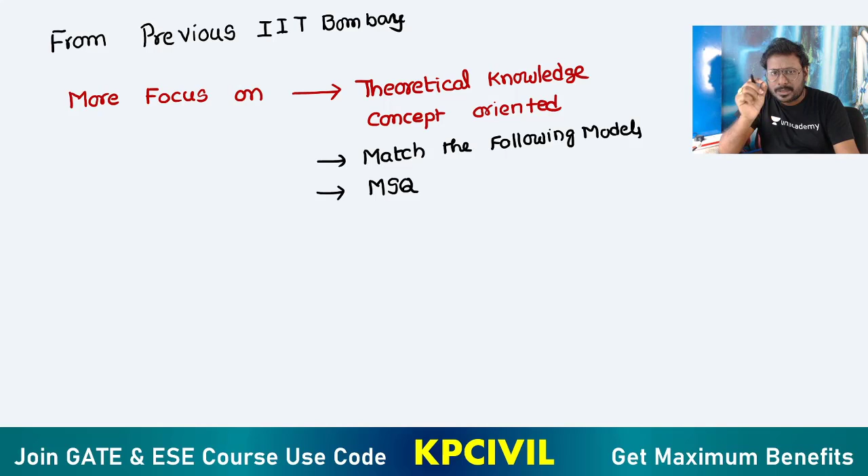All the questions are concept oriented, and the numericals are direct questions. From environmental engineering, there is no need to worry about numerical questions, they are direct. But concept oriented theoretical questions are coming, so focus on that. So what topics to focus on? You have to focus on the topic of sedimentation.

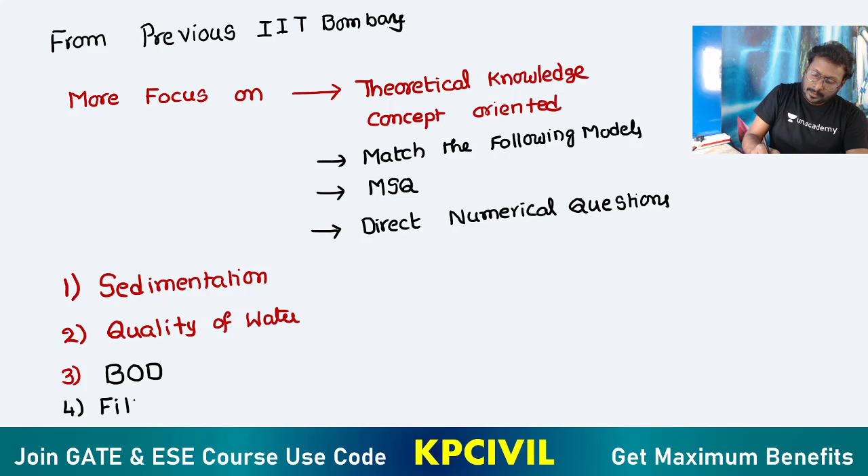As usual, we have theoretical questions from quality of water. Previous papers have more questions from quality of water. Environmental engineering will have more questions from quality of water, especially BOD and filtration. From these four topics, there are repeated questions. Also focus on activated sludge process. From the previous IIT Bombay papers, they give more weightage on quality of water and BOD questions. After that, they focus on sedimentation and filtration. From wastewater engineering, the one and only topic they focused more on is ASP, activated sludge process.

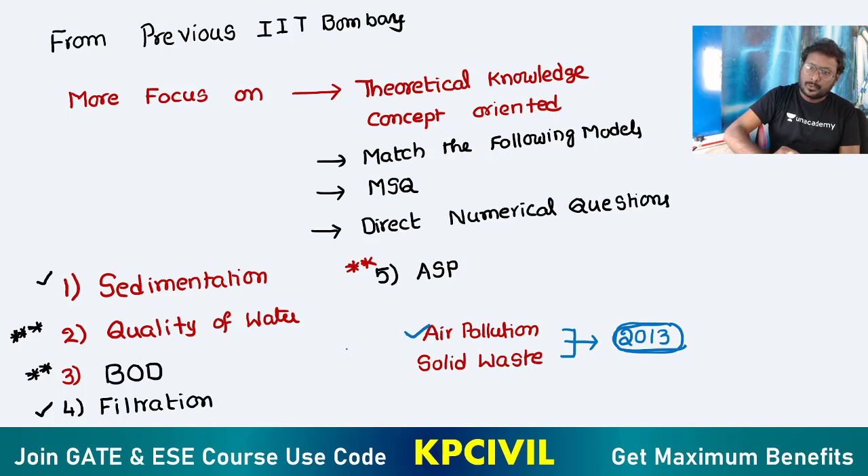Now you have one doubt - what about air pollution and solid waste management? These topics came into existence with more preference given in GATE examination only after 2010. After 2010, IIT Bombay conducted the exam only once, in 2013. In that year, they gave one numerical question from air pollution. So we expect these topics to come this year.

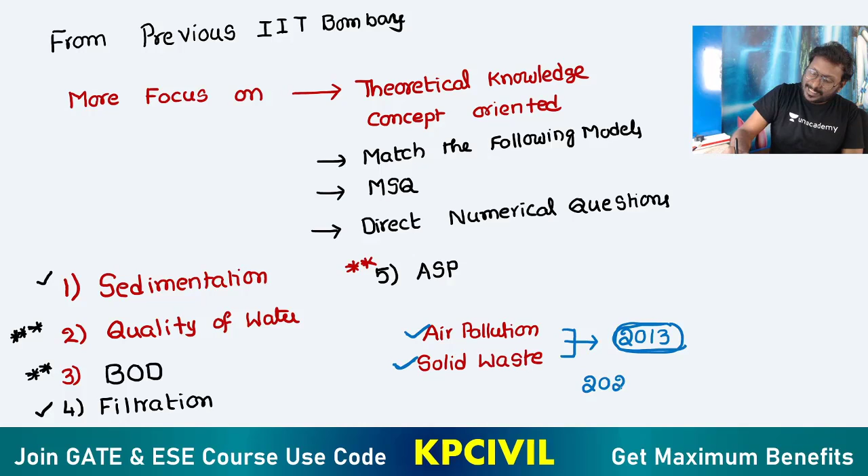In 2021, we have more expectations on air pollution and solid waste. Don't miss these topics. So if you want to solve questions from environmental engineering of IIT Bombay, these 7 topics are your target: sedimentation, quality of water, BOD, filtration, activated sludge process according to previous questions, and additionally focus more on air pollution and solid waste management.

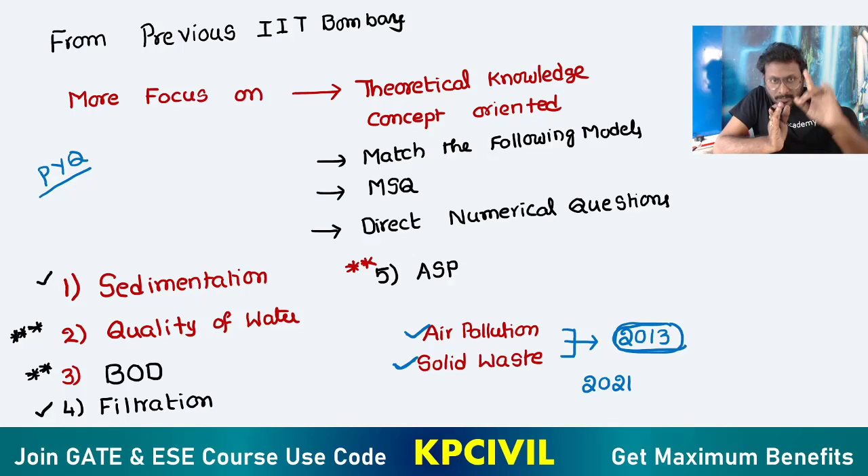A very important point I would like to tell you - IIT Bombay has not taken anything from other IITs' previous year papers. IIT Bombay has set a path for other IITs to follow. It has not at all taken any previous year question from other IIT question papers. Rather, other IITs have taken previous questions from IIT Bombay paper. So previous year questions of other IITs are not followed by IIT Bombay. Especially I am saying this about the environmental engineering subject. I don't know about other subjects, I have not analyzed that till now. Now I am saying this only about environmental engineering. Got it? You got the clarity?

About environmental engineering related to IIT Bombay, you focus on these 7 topics. More focus on concept oriented, more focus on theoretical knowledge. Especially you focus on match the following models.

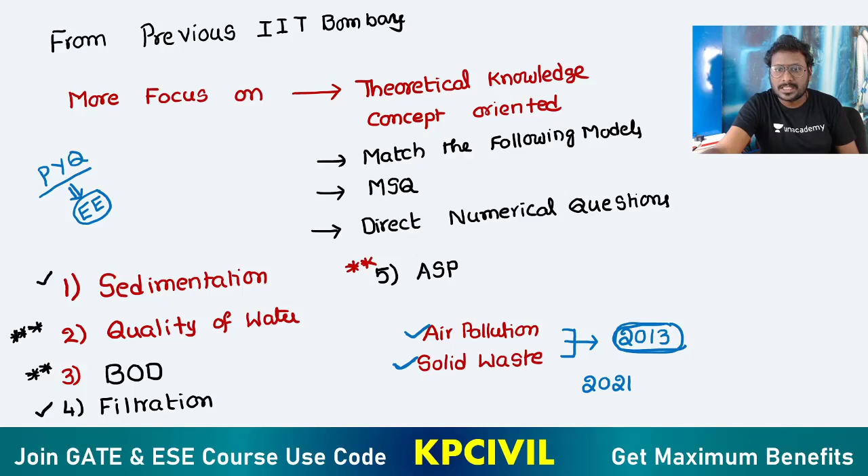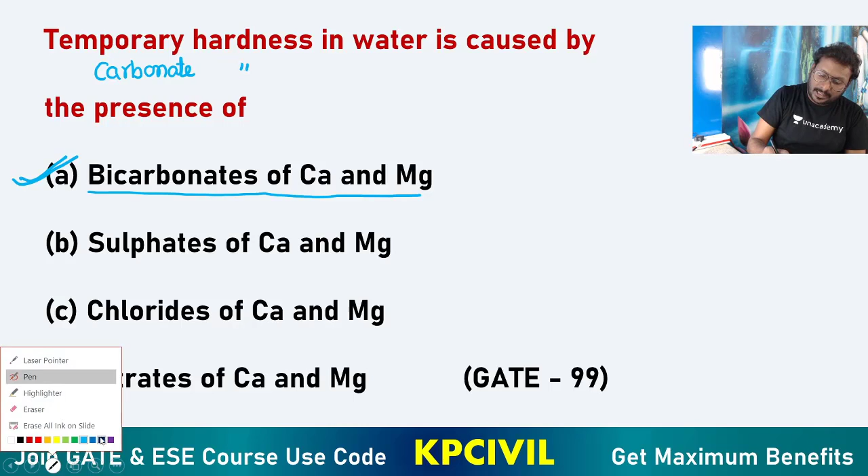Now we'll go ahead to solve the questions of IIT Bombay. Temporary hardness in water caused by presence of - several times in my classes I came up to solve this kind of model. I repeatedly told students this model of theoretical question is very important. Temporary hardness in water is caused by bicarbonates of calcium and magnesium. Any difficulty in the question? Only your confusion makes it difficult. Temporary hardness is also called carbonate hardness - both are same, just alternate names. So that was caused by bicarbonates of calcium and magnesium.

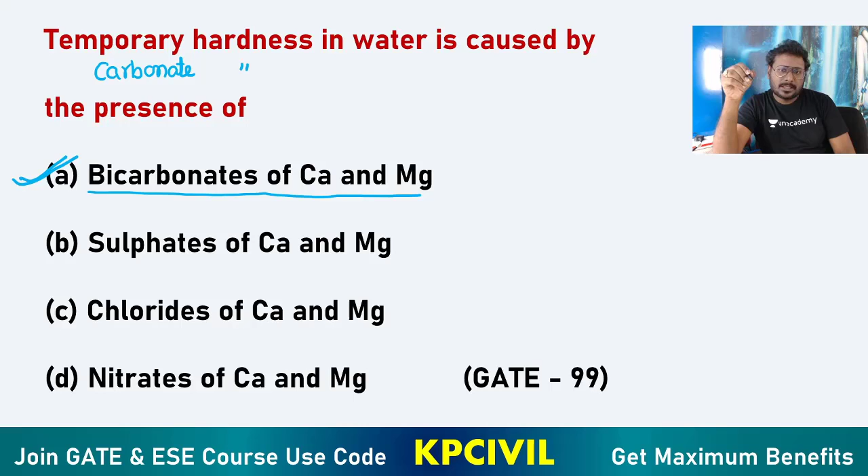Check out next options: sulfates of calcium magnesium, chlorides of calcium magnesium, nitrates of calcium magnesium. These three will cause permanent hardness, also called non-carbonate hardness. So this may be expected as MSQ.

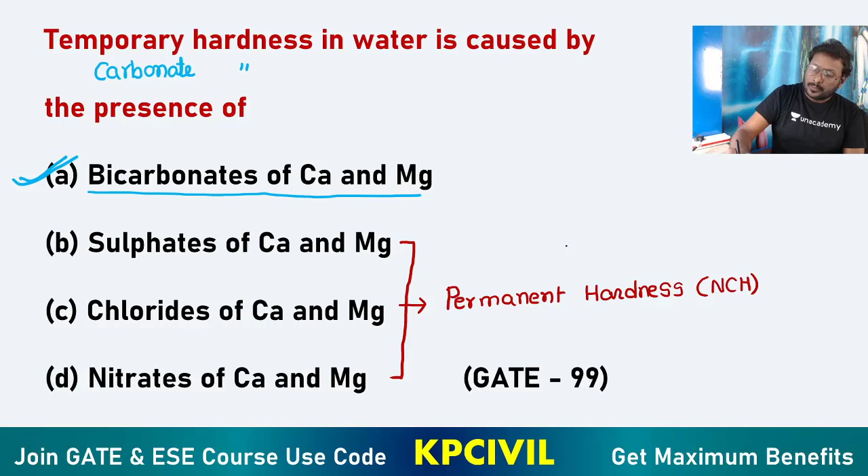In 2021, this may be expected as MSQ, multiple select question: chlorides of calcium and magnesium, sulfates of calcium and magnesium, nitrates of calcium and magnesium. So all 4 same options they will give. Permanent hardness of water is caused due to all 3 - B, C, D. It is given as MSQ question, so B, C, D will become your answer for permanent hardness. But as per the 1999 paper, the option is temporary hardness of water caused due to bicarbonates of calcium and magnesium. We'll move on to the next one.

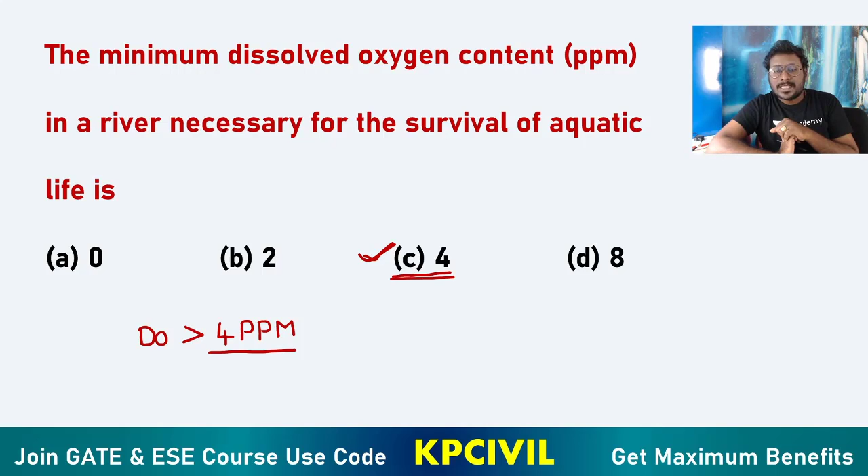The actual answer is that for all aquatic life, dissolved oxygen must be greater than 4 ppm. According to the options, we select option C, 4 ppm. Clear, minimum dissolved oxygen content for aquatic life is greater than 4. Only for fishes is it 4, but we don't have such an option here, so we select option C, 4 ppm. Minimum DO required in a river for survival of aquatic life is 4 ppm. These are all conceptual, theoretical questions depending upon quality analysis of water.

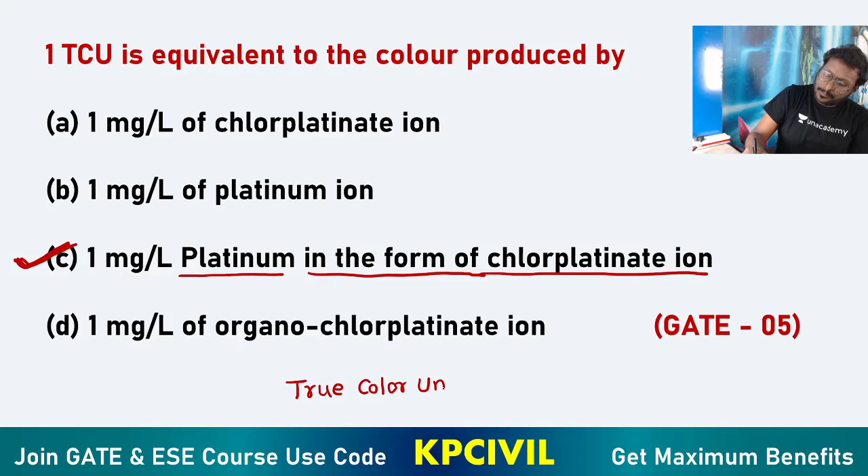1 TCU is equivalent to the color produced by 1 mg per liter of platinum, added in the form of chloroplatinate ion, not by chloroplatinate, not by platinum alone. So the answer is option C, not A and not B. But mostly in a hurry, we answer A or B, and get negative marks. Be careful regarding answers, especially theoretical questions. So what is the answer? 1 milligram per liter of platinum added in the form of chloroplatinate ions, that is 1 TCU. What is TCU? True color unit. 1 TCU is equal to 1 true color unit.

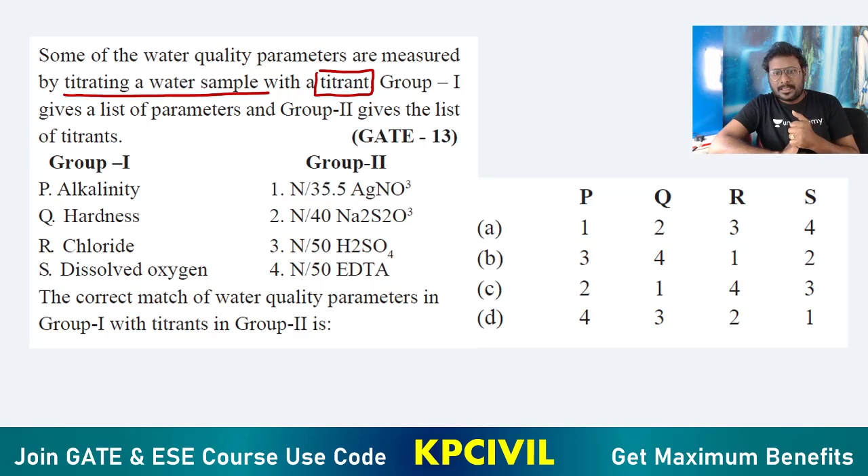I told you in the beginning, in the introduction itself, about match the following questions. Some water quality parameters are measured by titrating a water sample with a respective titrant. Group 1 gives a list of parameters, Group 2 gives a list of titrants. So Group 1 is the quality parameter, Group 2 is the titrant. You need to match both.

Alkalinity - the titrant for an acid is alkali, and the titrant for an alkali is acid. H2SO4, so it is 3. Hardness - what is the titrant for hardness? EDTA, ethylene diamine tetraacetic acid.

EDTA, I will write it down: ethylene diamine tetraacetic acid, EDTA. So hardness is EDTA, number 4. Chloride is nothing but silver nitrate, AgNO3. Dissolved oxygen is Na2S2O3, sodium thiosulfate. So the sequence is 3, 4, 1, 2.

Option B: 3, 4, 1, 2. For alkalinity, sulfuric acid H2SO4; for hardness, EDTA; for chlorides, silver nitrate AgNO3; for dissolved oxygen, sodium thiosulfate Na2S2O3.

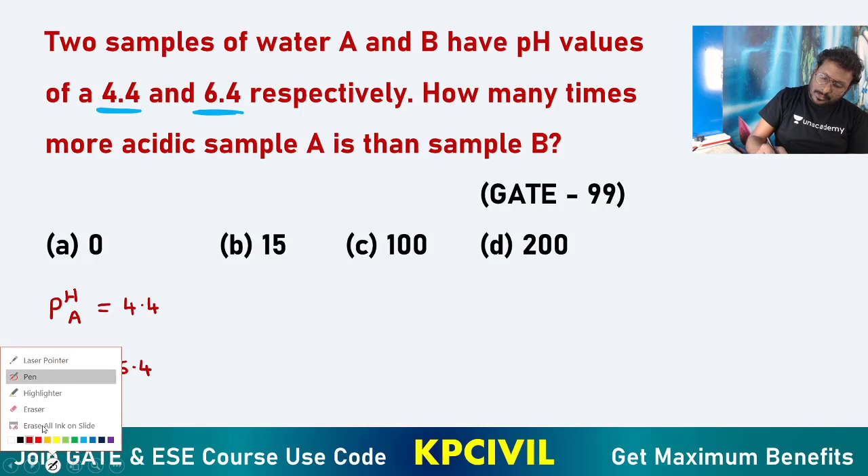pH of B, you take it as 6.4. I am writing hydrogen ion concentration here, because solution A and solution B pH values are not at all compared anywhere, only compared with hydrogen ion concentration. Hydrogen ion is 10 power minus 4.4 for A, 10 power minus 6.4 for B.

Now I am taking the ratio of hydrogen ion concentration of A to hydrogen ion concentration of B. What can we write down? 10 power minus 4.4 by 10 power minus 6.4. What does it come to? 100. 100 only, no? We write it down like this.

H plus of A is equal to 100 into H plus of B. So how many times higher? 100 times, option C, no? H plus of A is 100 times higher than H plus of B. That is the answer. Got the clarity? You understand the question? Simple. Ratio of hydrogen ion of A to B, that is the answer, 100 times.

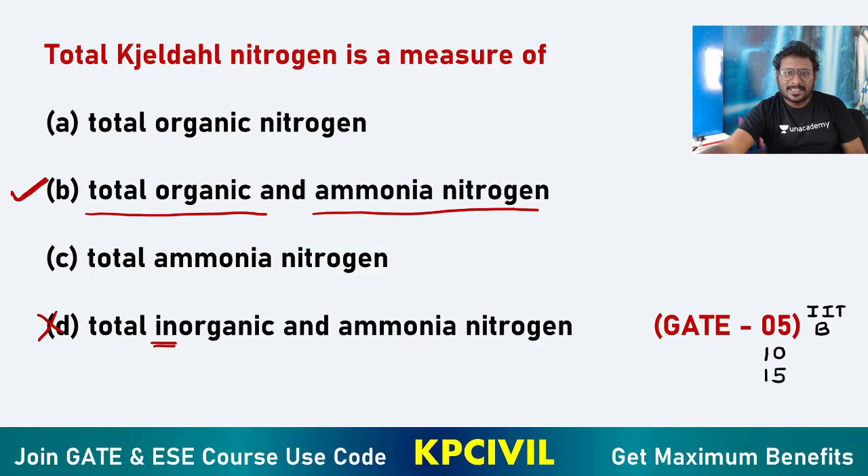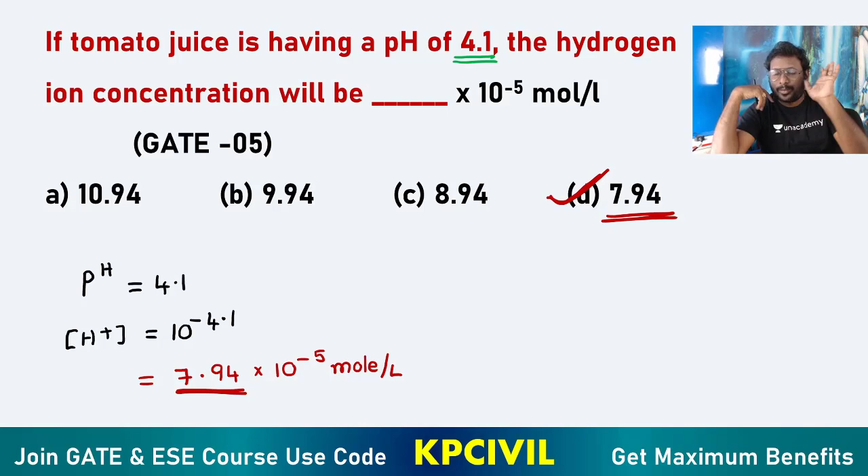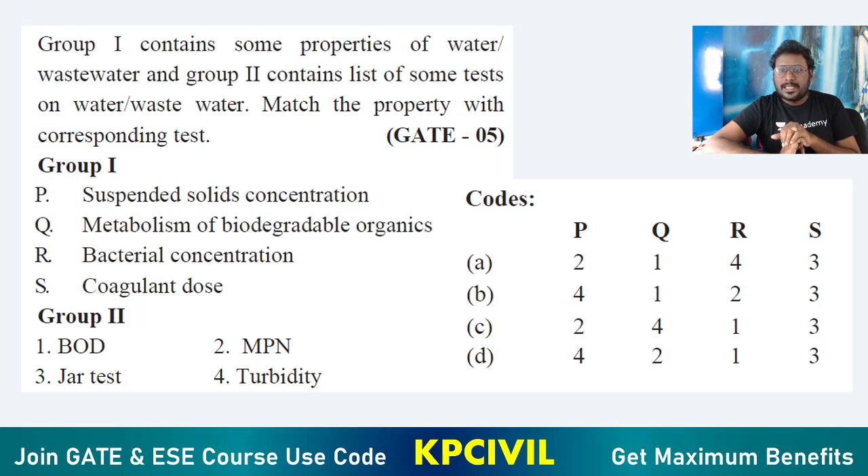Wow, again match the following. See how many match the followings are coming. Group 1 contains some property of water or wastewater. Group 2 contains a list of some tests on water and wastewater. Match the property with the corresponding test.

Suspended solids concentration - suspended solids estimated by turbidity. Suspended solids concentration is known by turbidity test.

Metabolism of biodegradable organics - biodegradation of organic matter. So how can you express biodegradable organic matter? Biodegradable organic matter is directly proportional to biochemical oxygen demand, BOD.

So only one option is matching 4-1. Directly we can give the answer: 4-1, 2-3. Bacterial concentration is nothing but most probable number, MPN. You are determining bacterial number by the most probable number test, MPN.

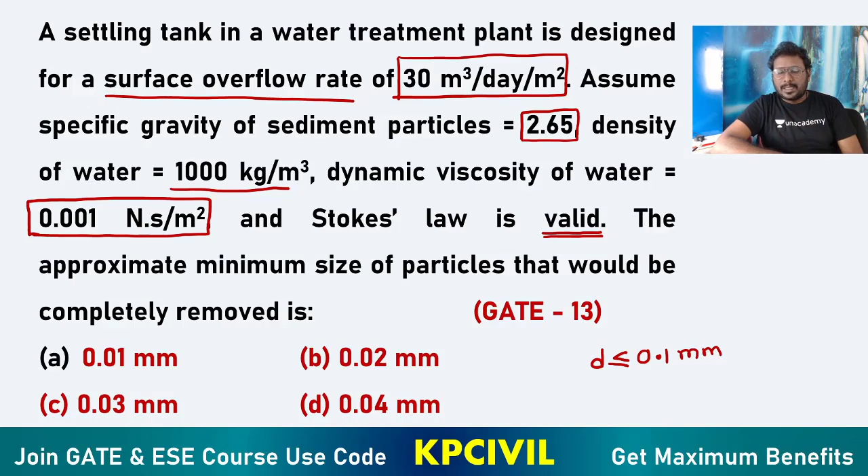The approximate minimum size of particles that would be completely removed is - so the lowest diameter of particle that should be removed. So we have the formula for settling velocity.

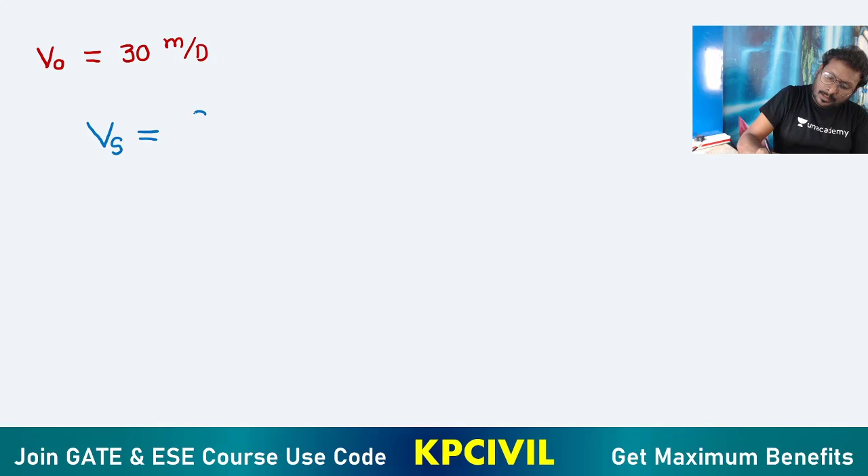We can write down Vs is equal to G d square by 18 mu, into rho p minus rho w.

And the particle is completely removed. What is the meaning of completely removed? V naught itself is taken as Vs. So take Vs as 30 meter per day.

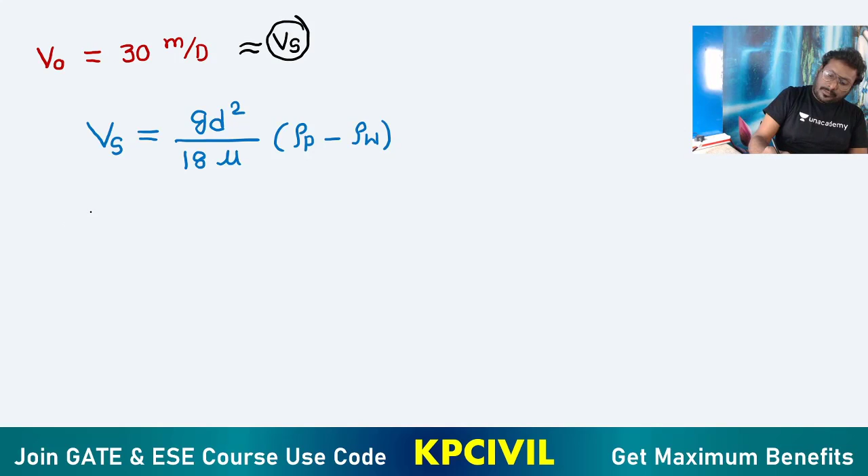Convert to second: 30 divided by 24 into 60 into 60. Why we are taking this? For conversion of meter per day to meter per second.

This is the settling velocity Vs. Substitute into the formula. G is 9.81. D is required, that is only needed, diameter. Diameter only needed, you write down D square.

18. Dynamic viscosity given. What is the value of dynamic viscosity? 0.001 Newton second per meter square.

Density of particle given, specific gravity given. Specific gravity how much? 2.65. So density of particle is equal to 2.65 into density of water, 1000. You take 2650 kg per meter cube.

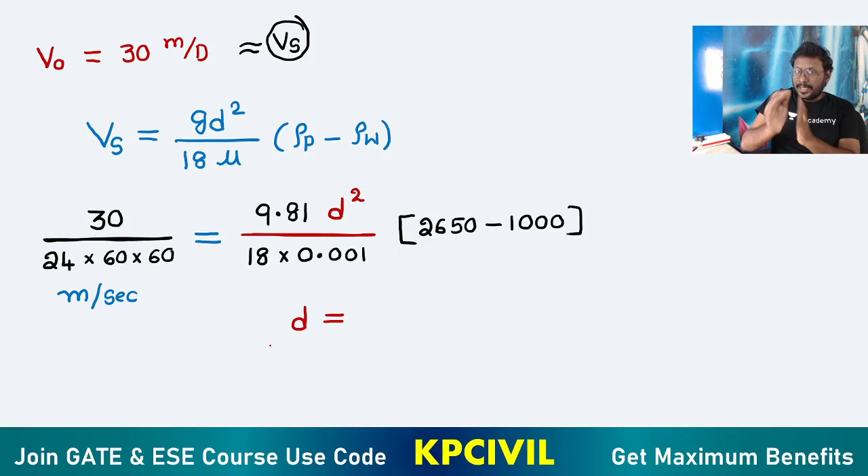So you need it in millimeter. First, what you are getting is in meter. What you are getting? 1.96 into 10 power minus 5 meter.

So you have to convert to millimeter now. To convert meter to millimeter, you multiply with 1000. What you can write down?

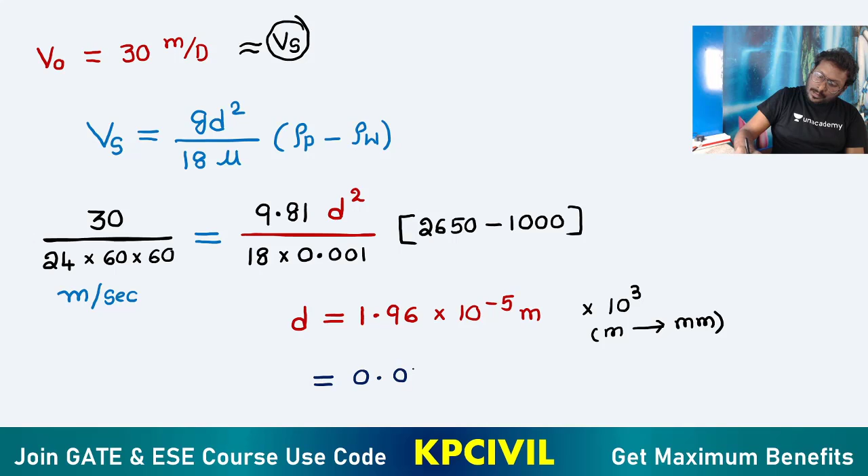0.0196 mm. So if you want to round off, you take 0.01 or 0.02. 0.0196 mm, you are rounding off to 0.02 mm. This is the answer, got it? 0.02 mm is the answer, option B.

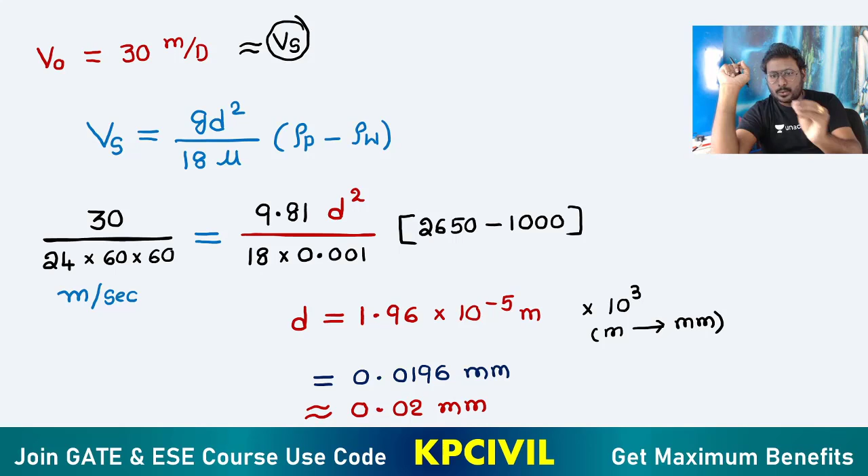Only thing you know: V naught is equal to Vs. Vs is equal to G d square by 18 mu into rho p minus rho w. Substitute in the formula, you get the answer, option B. So answer is option B, 0.02 mm.

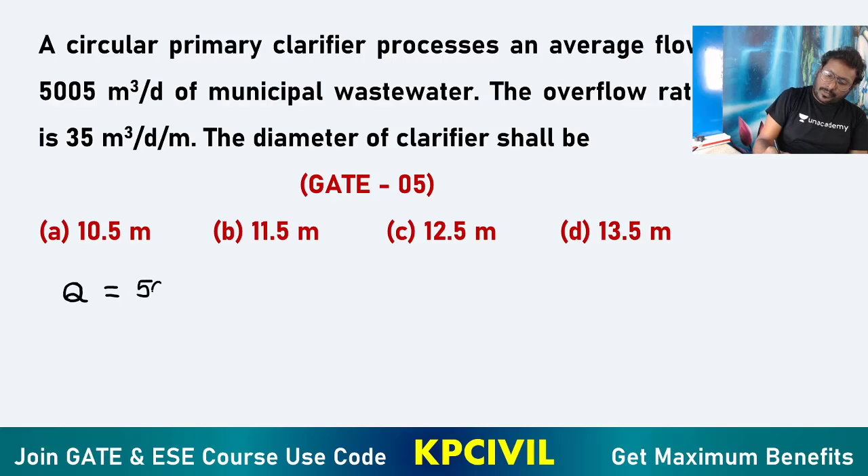Next question. A circular primary clarifier processes an average flow discharge of 5005 meter cube per day of municipal wastewater. The overflow rate V0 is 35 meter cube per day per meter square.

How we can write down now? 35 meter per day. Discharge in meter cube per day. V0 velocity in meter per day. Diameter of clarifier is?

We can write down surface area is equal to Q by V0. That itself is equal to pi by 4 d square. Is it not? So what is the diameter now?

Diameter is equal to 4Q by V0 into pi under the root. We can take it now: 4Q by pi V0 under the root. That is the diameter. Substitute in the formula.

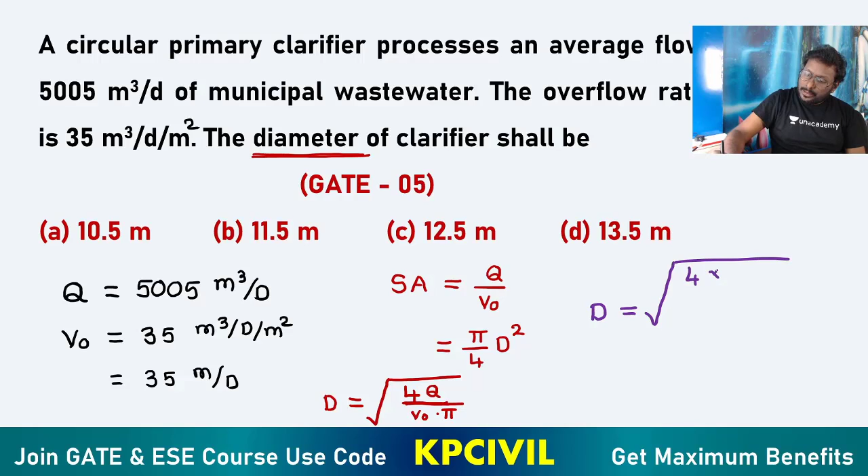Diameter is equal to under the root of 4 into Q, 5005, divided by V0, 35, into pi. What you will get? Under the root of 4 into 5005 by 35 into pi. That is the diameter of the chamber. What you are getting? 13.5 meter.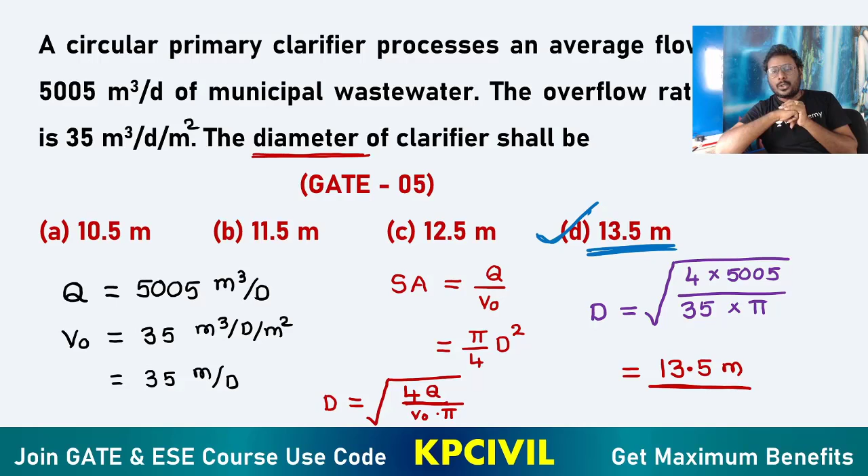Just you know the formula for surface area. One is pi by 4 d square, another one is Q by V0. Any difficulty? Direct substitution. Question is completed.

Now filtration. A water treatment plant is designed to treat 1 meter cube per second discharge of raw water. It has 14 sand filters. Number of filters is equal to 14.

Surface area of each filter is 50 meter square. Surface area of each filter, what we can take? Individual surface area, ISA. Individual surface area of filter, 50 meter square.

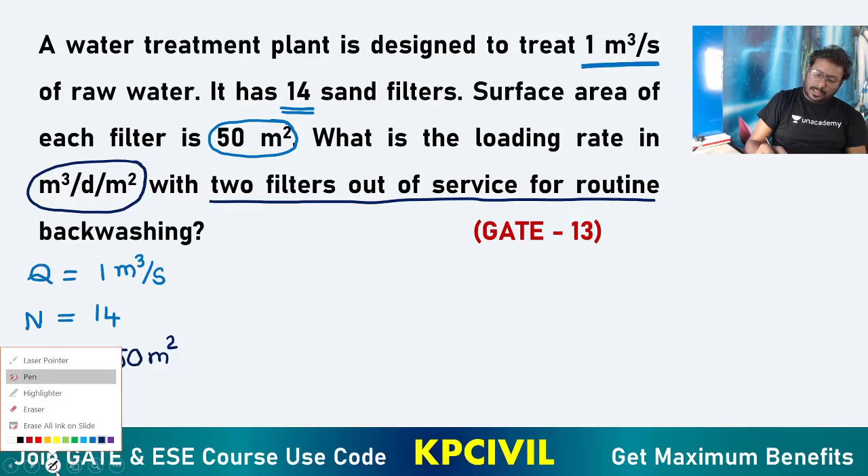What is the loading rate in meter cube per day per meter square, with 2 filters out of service for routine backwashing? What is the meaning of that? 2 filters you are giving for backwashing means out of 14 filters, 12 are working.

Rate of filtration is equal to discharge by number of filters into individual surface area. Direct single step: discharge by total area. Total area is given as number of filters into individual area. Simple, no? Discharge by total area, total area is number of filters into individual area.

Converting to meter cube per day: 1 into 24 into 60 into 60. Discharge meter cube per second to meter cube per day. Number of filters 12, individual surface area 50. So what is your answer you are getting?

144 meter cube per day per meter square. This is the discharge in meter cube per day divided by individual surface area in meter square: 1 into 24 into 60 into 60, divided by 12 into 50. 144 is the answer. Any difficulty? Simple formula: Rate of filtration equals Q by N into individual surface area.

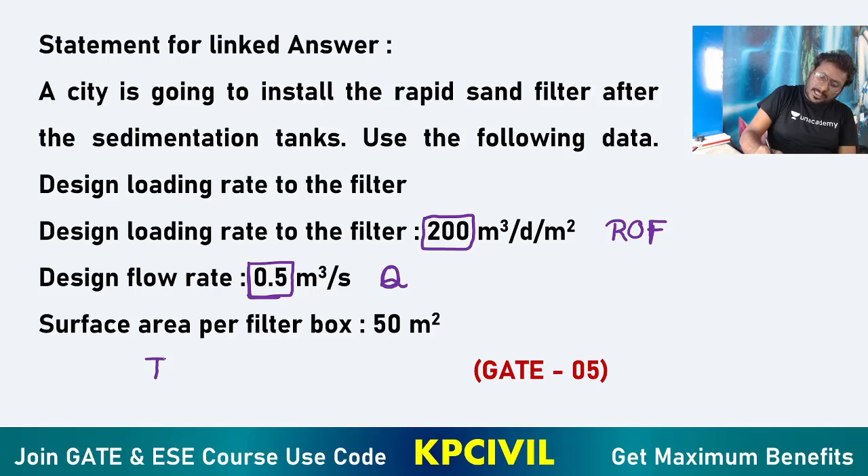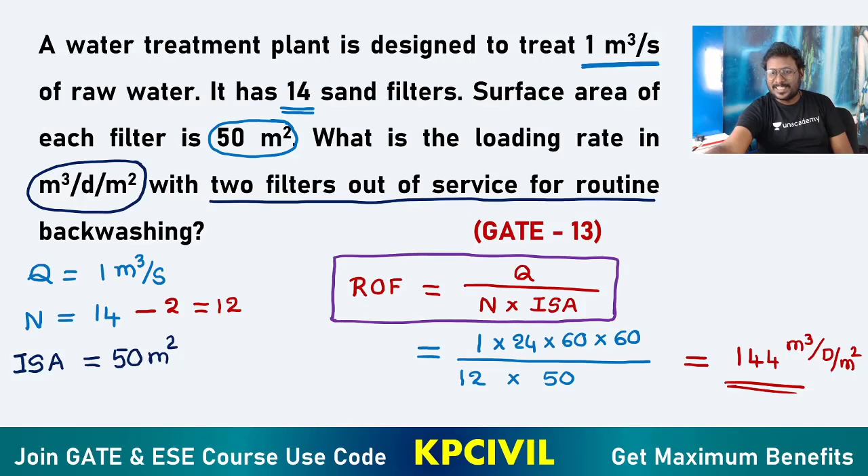Discharge Q is 0.5. Surface area of each filter box, that is individual surface area, is 50 meter square - same as the previous question. 2005 also 50 meter square, 2013 also 50 meter square, they haven't changed the number. So rate of filtration is 200, discharge is 0.5, individual surface area is 50.

Surface area required for the rapid sand filter - total surface area. What is the formula for total surface area required? Discharge by rate of filtration. Any difficulty in this? Total surface area equals discharge by rate of filtration.

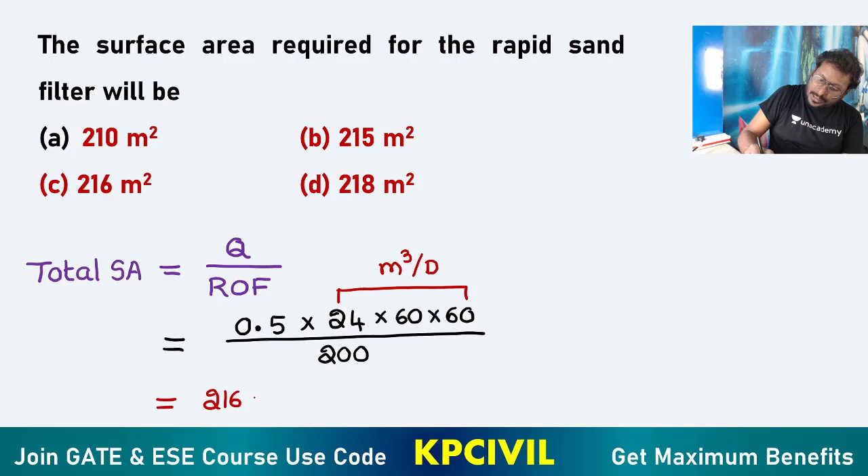Discharge is 0.5 meter cube per second. You convert meter cube per day: 24 into 60 into 60, divided by rate of filtration of 200. If you know only unit conversion, your question is finished - this conversion is for meter cube per second to meter cube per day. What do you get? Total surface area 216 meter square. Any difficulty in the question? 216 meter square, got it now? Easily you got the marks now.

Same data, linked answer question, same data: number of filters required. Number of filters needed - what is the formula? Number of filters equals total surface area divided by individual surface area.

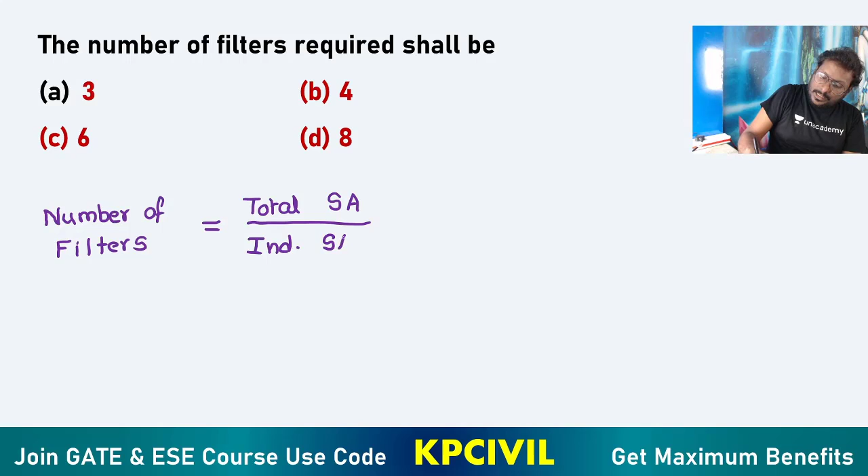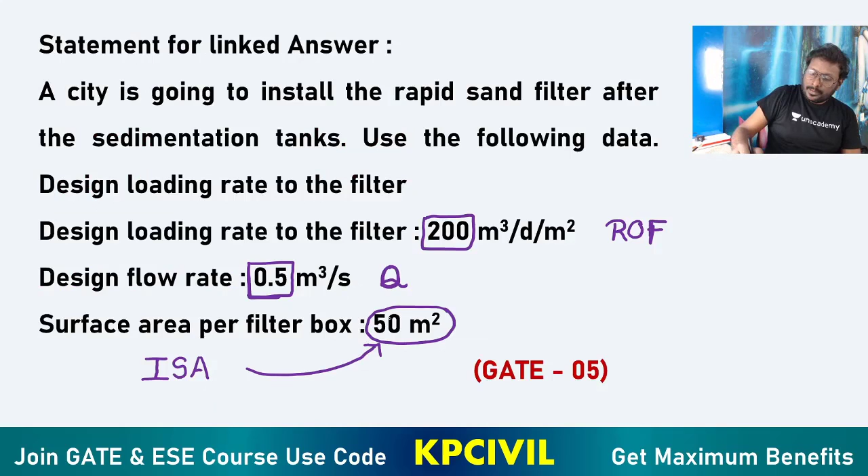What did you get for total surface area just now calculated? 216 is the total. What is individual? 50 is individual. Simple, just a ratio. Total is 216, individual is 50. You get 4.32.

So for the nearby value, take the highest value. The nearby higher value is 6. Because this is a rapid sand filter, you may require one filter additional for cleaning. So you take 5.32, nearby 6. Since 5 is not an option, we select the highest value, which is 6. Answer is 6. The reason: 4.32 is exactly required, 1 is for backwashing, giving 5.32, so we go with 6 as the answer. Number of filters - nothing complicated in this numerical question, direct formula questions only. Got it?

Again, match the following - understand? What is IIT Bombay giving in GATE? Total concept incorporated into match the following questions. In the distribution system, one and only question from IIT Bombay: types of valves and their function.

Release valve - what is the release valve going to do? Remove air from the pipe. The release valve removes air from the pipeline, which needs to be removed.

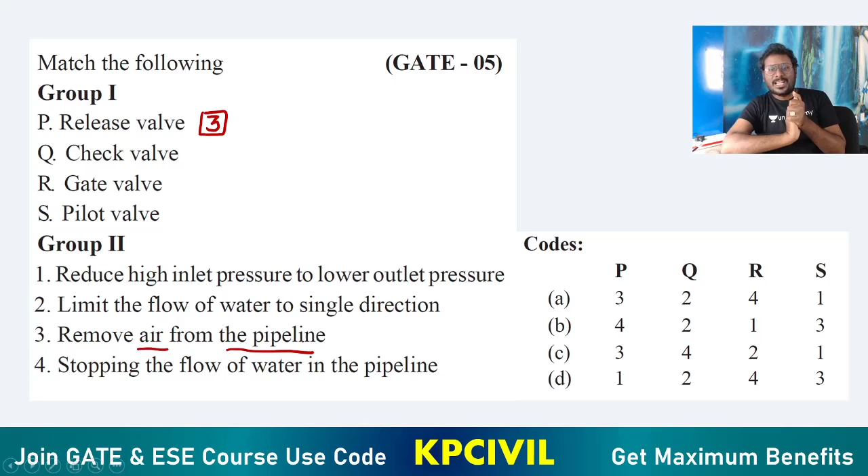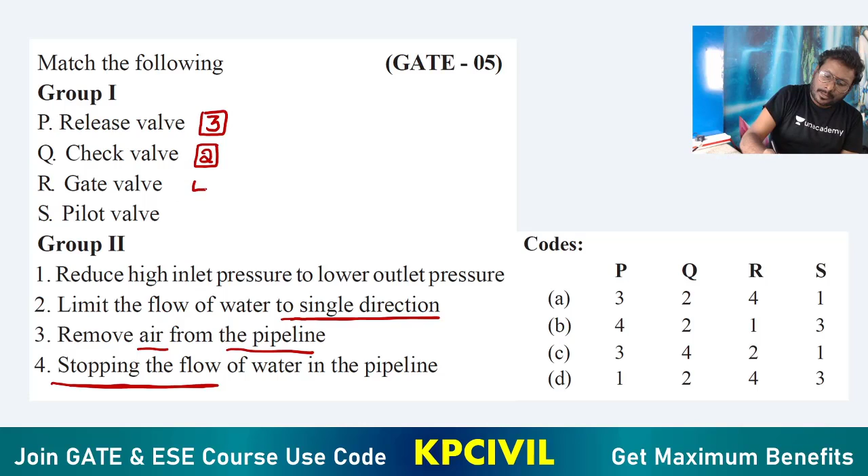Check valve limits the flow to a single direction. We often confuse gate valve and check valve. What does the gate valve do? Stop the flow - like a gate for your house, it will stop the entry. Entry and exit will be stopped by the gate. Same thing here, gate valve for water will stop the entry and exit. So no confusion. Pilot valve reduces high inlet pressure to low outlet pressure.

Reminding: 3-2-4-1. Pilot valve is a pressure control valve, gate valve is a water flow stoppage valve, check valve allows water to flow only in one direction - single direction, very important - and release valve reduces or removes air from the pipe. 3-2-4-1, option A is 3-2-4-1.

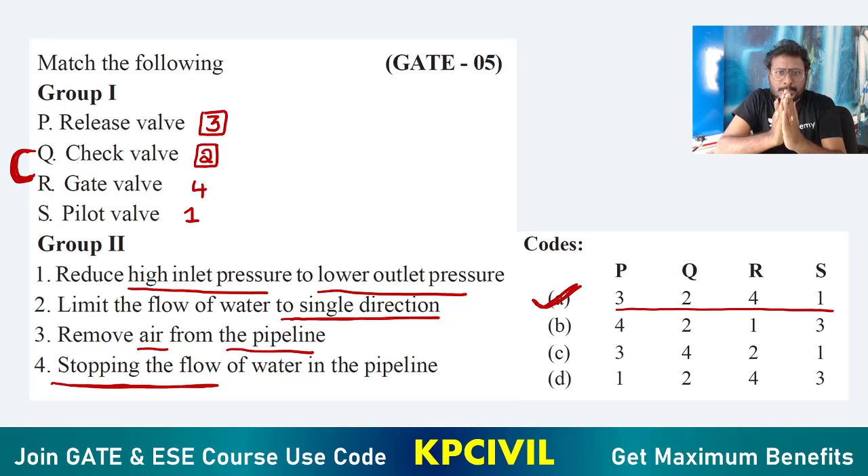Only confusion is between check valve and gate valve - we have confusion among these two. Check valve allows water to flow in one direction, gate valve stops entry and exit.

Standard 5-day BOD of wastewater sample is nearly X percentage of ultimate BOD. What percentage? No doubt, right?

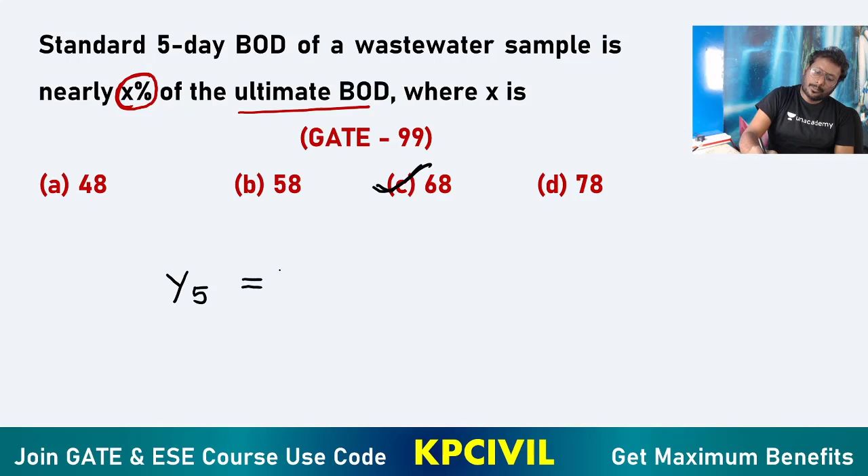68%. Y5 is equal to 68% of ultimate BOD, YU. In a BOD test, 5 ml of wastewater is added to 295 ml of aerated pure water. So in a BOD test, A is 5 ml and B is 295 ml.

So what is the dilution factor here? You can write down the dilution factor using A and B. A is 5 ml, B is 295 ml. 5 plus 295, total volume by sample volume 5. What is the dilution factor? 60. Formula is there, na? Dilution factor formula is A plus B by A.

Now, initial dissolved oxygen content of diluted sample, DOI. After 5 days of incubation at 20 degrees Celsius, the DO content of the sample reduced to 4.4. This is DOF, the final DO.

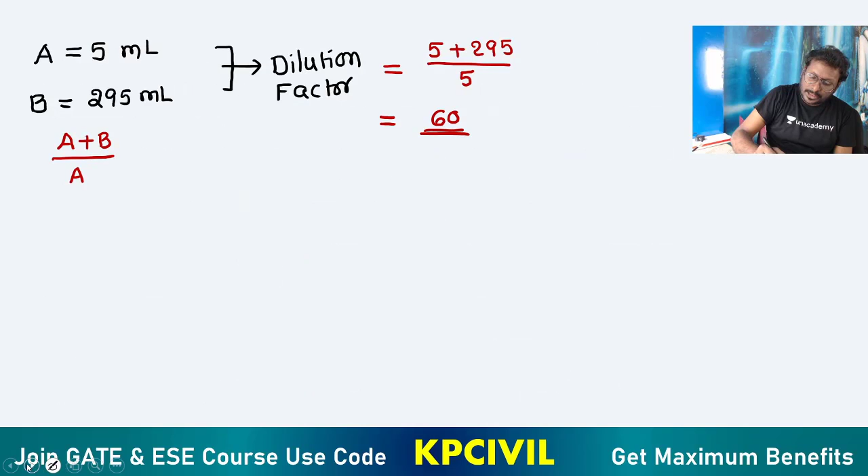What you are getting? What is your answer? Simple calculation, 204. You are getting 204 mg per liter as the answer. Option C. Only thing you need to know is dilution factor is 60, then initial DO minus final DO into dilution factor gives you 204 mg per liter.

Now coming to the next question. A student began an experiment for determination of 5-day 20 degrees Celsius BOD on Monday. Since the 5th day fell on Saturday, the final DO readings were taken on the next Monday. So how many days, Monday to Monday? 7 days. On calculation of BOD, 7-day 20 degrees Celsius BOD was found to be 150 milligram per liter. What would be the 5-day 20 degrees Celsius BOD?

Assume BOD rate constant at standard temperature is 0.23 per day. I will make it very simple. BOD7 at 20 degrees Celsius is equal to 150. K value is given as 0.23 per day. What you need to estimate is the 5-day 20 degrees Celsius BOD.

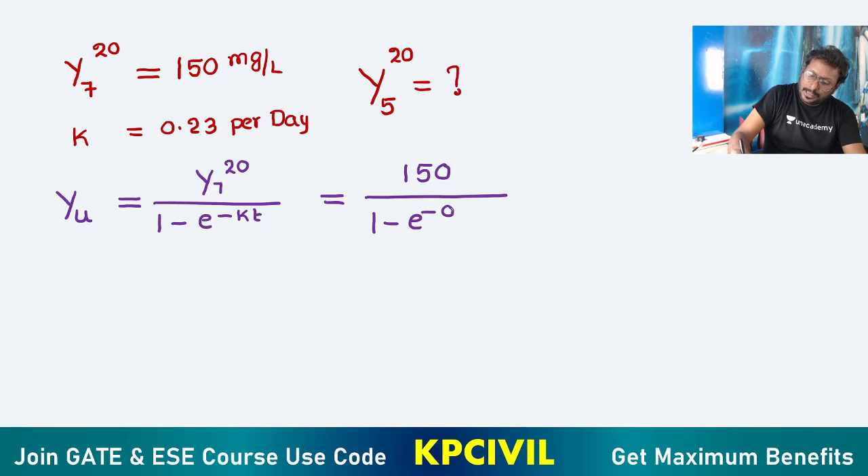Why is 5-day at 20 degrees Celsius needed? 7-day 20 degrees Celsius BOD is provided. First your target is ultimate BOD, YU. You can take Y7 at 20 degrees Celsius divided by 1 minus e power minus kt. Solve it: 150 divided by 1 minus e power minus 0.23 into 7.

You are getting the ultimate BOD value. What is the value? 187.473 mg per liter. Now our question is related to Y5 at 20.

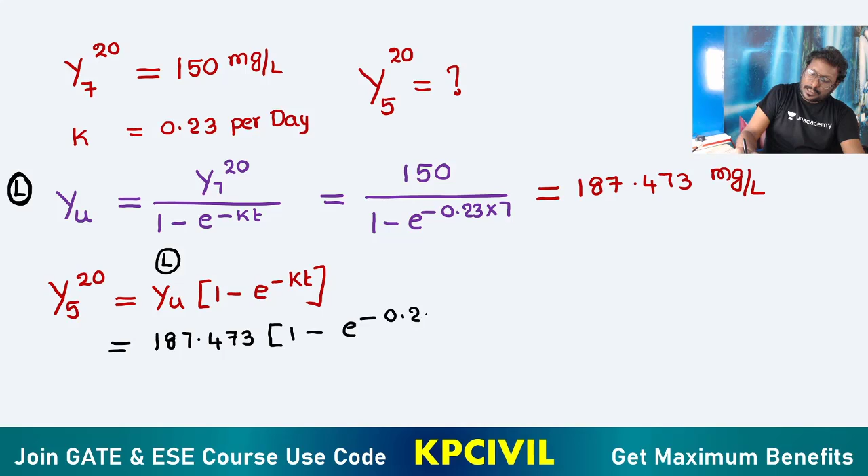Ultimate BOD into 1 minus e power minus kt. It may be taken as L value or as ultimate BOD, that is up to you. You may take this as L into 1 minus e power minus kt or ultimate BOD into 1 minus e power minus kt, same answer you will get. 187.473 into 1 minus e power minus 0.23 into 5 days now.

Time is changing, 5 days. What is the answer you are getting? 5-day BOD is 128.112 mg per liter. This is the answer. Simple conversion: 7-day BOD to ultimate BOD to 5-day BOD, just conversion only, you will get the answer 128.11.

Got it? Very easy, na? 7-day to ultimate to 5-day. Okay, we'll move on.

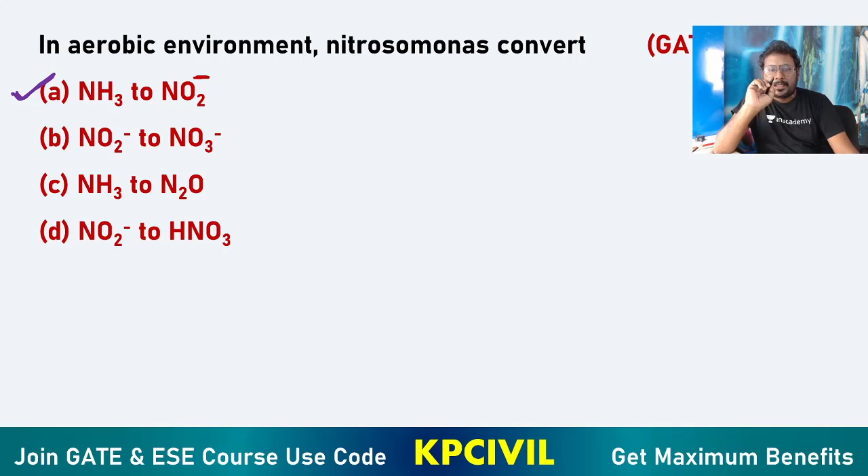In aerobic environment, nitrosomonas will convert. Very simple, in aerobic environment nitrosomonas is going to convert ammonia, NH3, to nitrites, NO2 minus. Nitrosomonas is the bacteria which converts ammonia to nitrites.

Chlorine is sometimes used in sewage treatment - see how much theoretical depth they are asking. Nitrosomonas is the bacteria we use in sewage treatment plants, that's the depth they are asking. Again, usage of chlorine in sewage treatment - the theoretical concept clarity you need more. Chlorine is not required to avoid flocculation, there is no use of chlorine in flocculation.

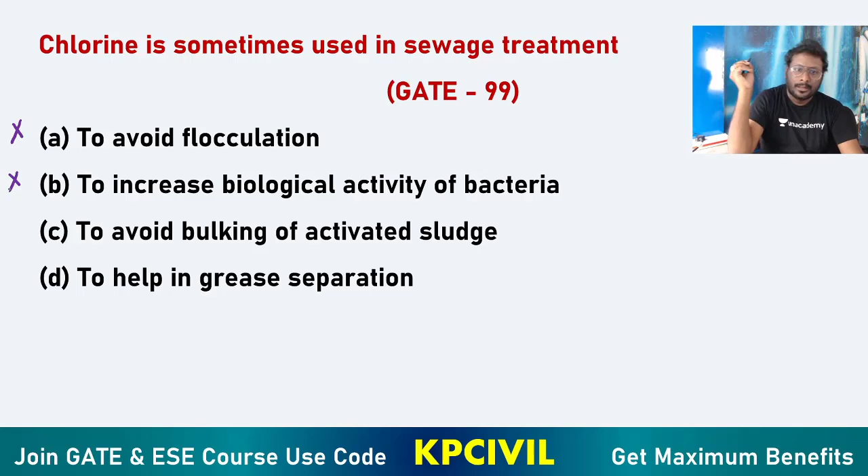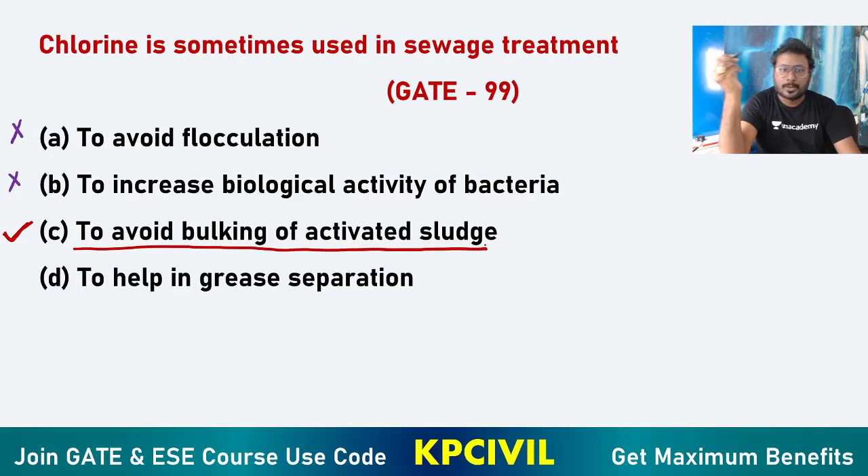Does chlorine increase biological activity of bacteria? No, biological activity of bacteria is decreased by chlorine. The correct function of chlorine is to avoid bulking in the activated sludge process.

Again, match the following. That is the beauty of IIT Bombay questions - they touch in-depth concepts through match the following questions. This relates to thickening of sludge, similar to the sludge digestion chart process of methods and functions I taught earlier.

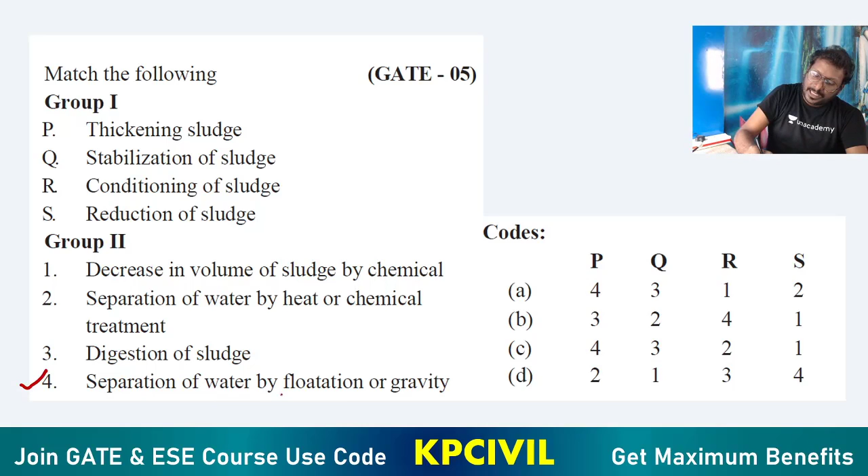Thickening of sludge means separation of water by gravity and flotation, carried out in sludge thickening.

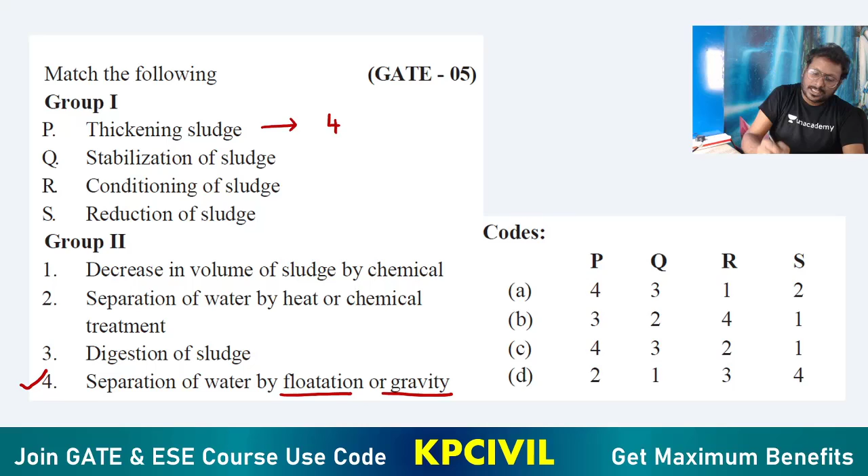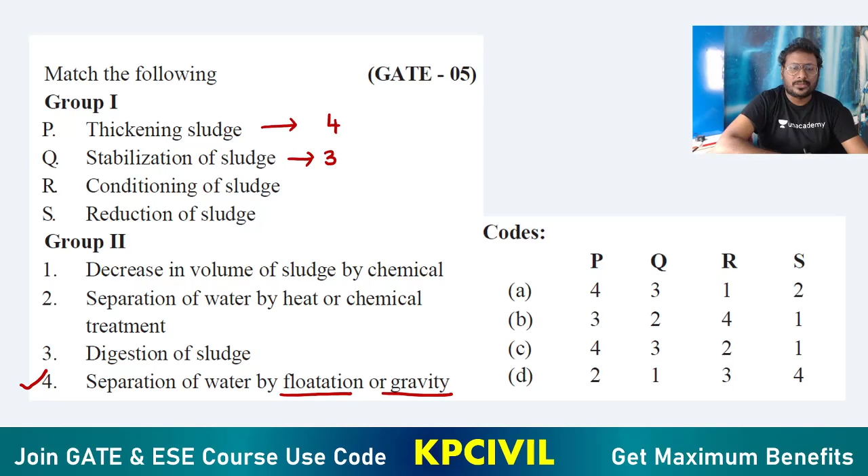Stabilization of sludge is nothing but digestion, sludge digestion only. Organic sludge is converted to inorganic - that is stabilization of sludge, which is digestion of sludge, i.e., conversion of organic sludge to inorganic.

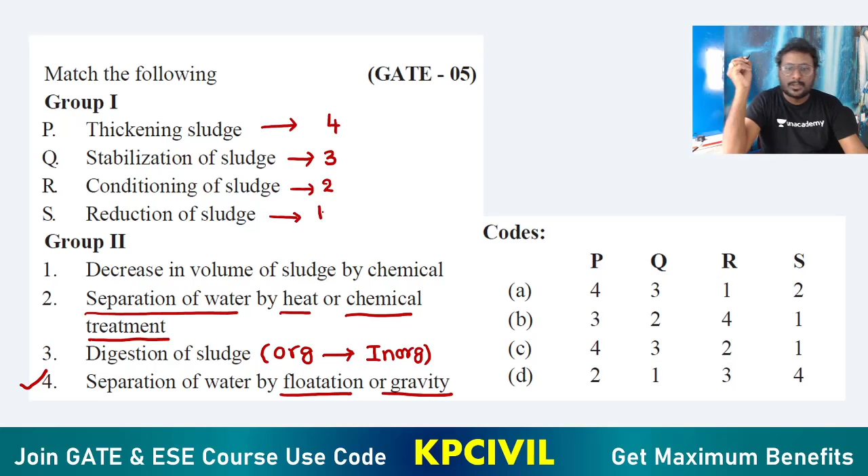Conditioning is the use of chemicals or heat treatment for separation of water. Reduction of sludge means decrease in the total volume of sludge through chemical treatment.

So the matching order is 4, 3, 2, 1 - option C.

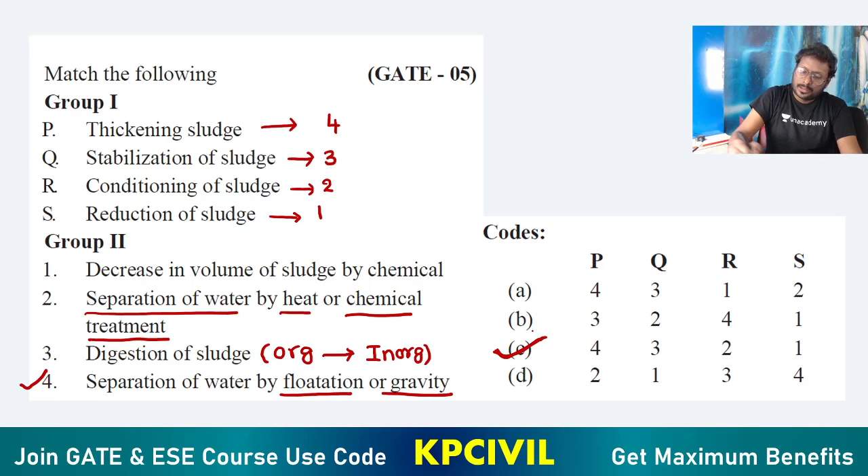Now the next question: in a certain situation, wastewater discharges into a river - this is related to effluent disposal. It mixes with the river water instantaneously and completely. The following data is available.

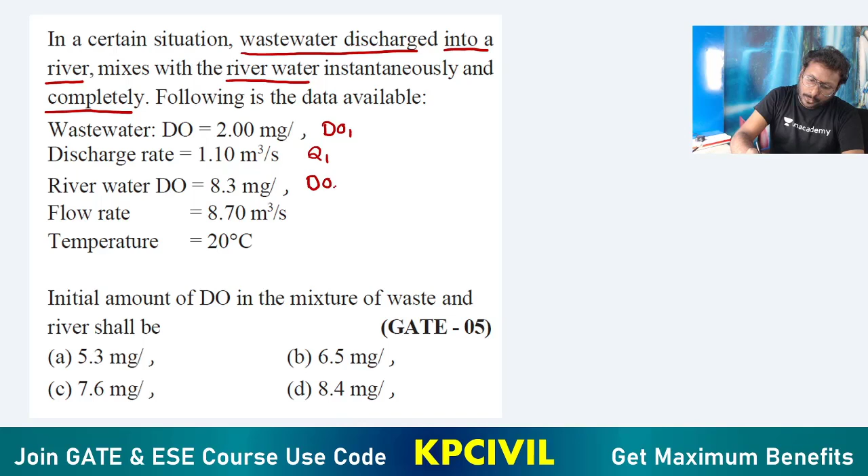Wastewater DO and discharge rate - take it as DO1, Q1. River DO and flow rate - take it as DO2, Q2. Temperature is 20 degrees Celsius. We need the initial amount of DO in the mixture of waste and river, meaning immediately after mixing.

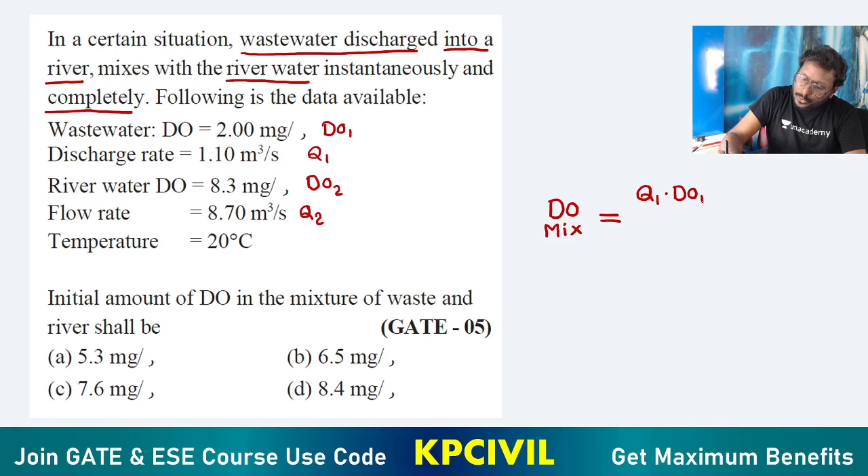What is DO mix? We can take DO mix as Q1 DO1 plus Q2 DO2, divided by Q1 plus Q2 - a weighted average. Simply perform the weighted average calculation to get the initial DO of the mix.

Q1 is 1.1, DO1 is 2 milligram per liter. Q2 is 8.7, DO2 is 8.3. Using Q1 DO1 plus Q2 DO2 divided by Q1 plus Q2, it's just a weighted average calculation - simply you will get the answer.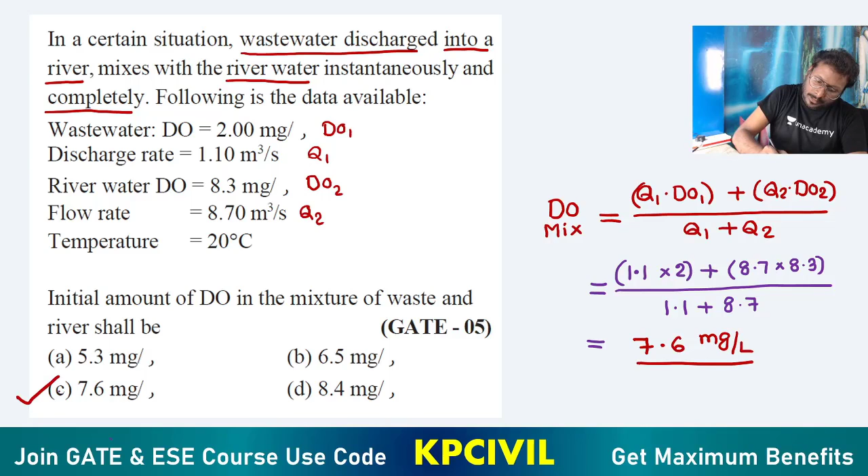The simple weighted average gives 7.6 milligram per liter - option C.

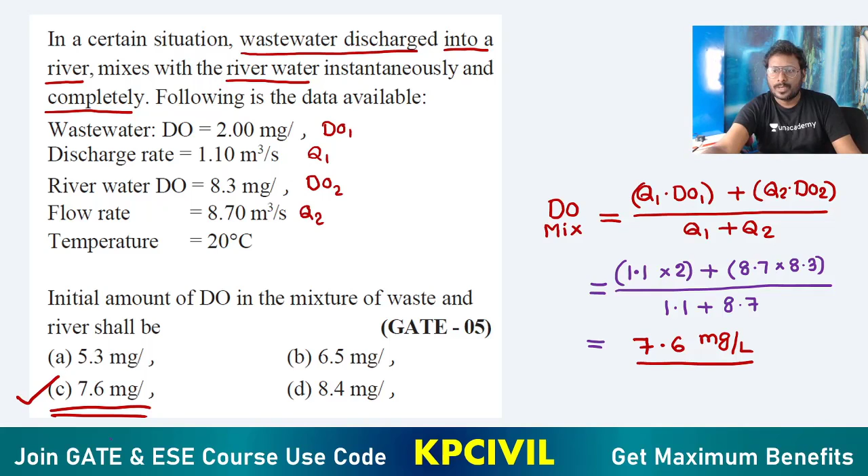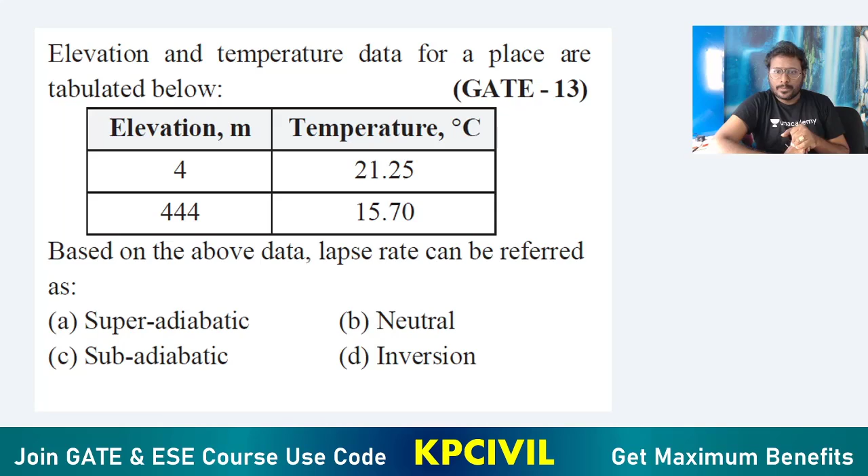We'll move on now. Elevation and temperature data for a place are tabulated: elevation Z1, Z2 and temperature T1, T2. Based on the above data, the lapse rate can be determined.

This is the first numerical question given on this topic in air pollution, started with IIT Bombay only. The lapse rate is required. The lapse rate formula is dt by dz.

Difference in temperature by difference in altitude - we write it as T2 minus T1 by Z2 minus Z1. That is the lapse rate formula, nothing more to add.

Now solve it. Lapse rate equals T2 minus T1 divided by Z2 minus Z1. T2 is 15.7, T1 is 21.25, Z2 is 444, Z1 is 4.

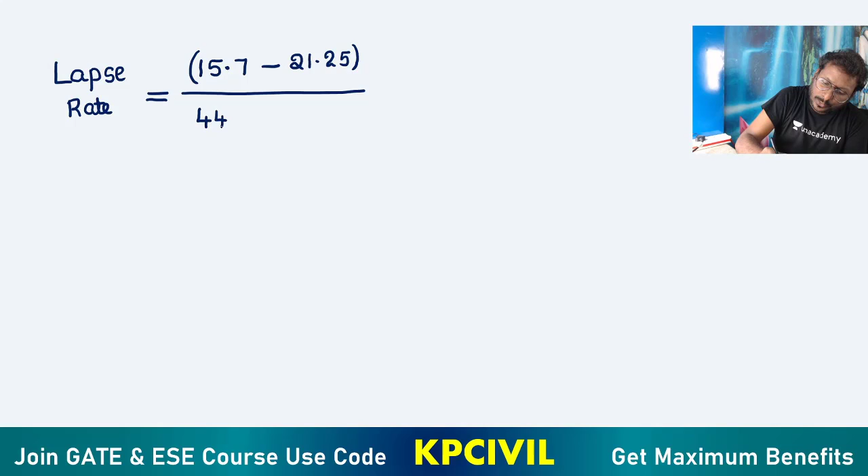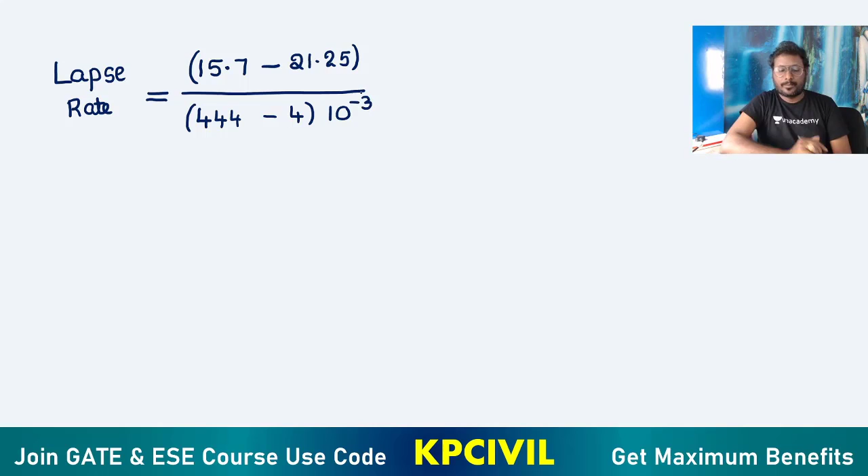444 minus 4 - but very important, this is in meters. We need to convert to kilometers by multiplying by 10 power minus 3, since altitude is given in meters and must be converted to kilometers. How much are you getting?

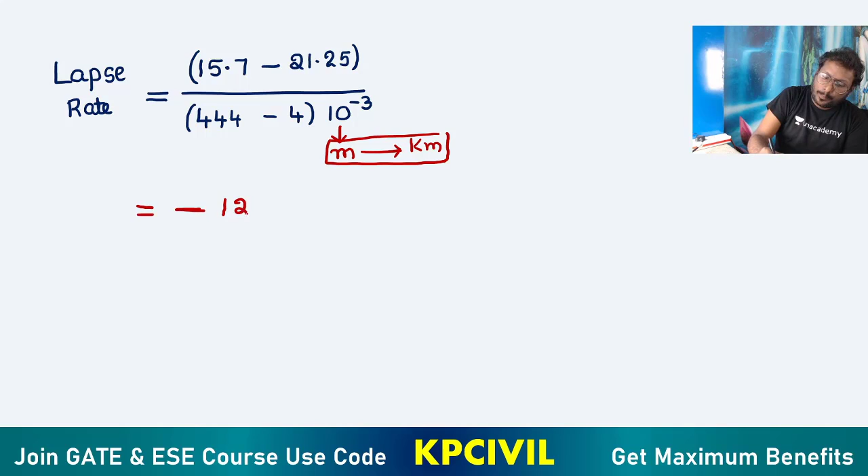Minus value, 12.61 degrees Celsius per 1 kilometer. So what is actual dry adiabatic lapse rate?

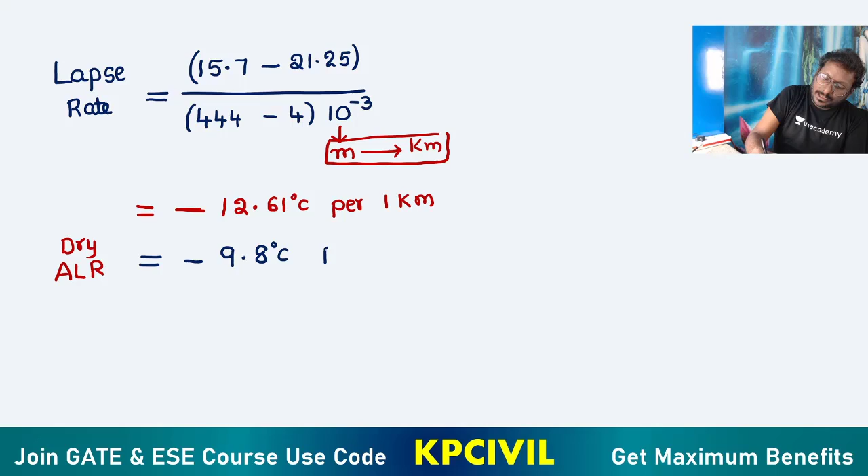Dry adiabatic lapse rate, reference lapse rate, you take as minus 9.8 degrees Celsius per kilometer. This is the environmental practical lapse rate you got from calculation. What is the relation now?

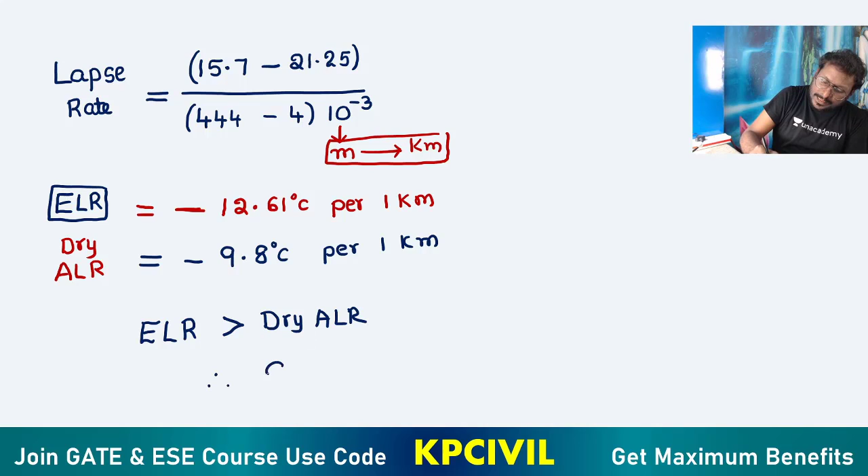Environmental lapse rate is greater than dry adiabatic lapse rate, the reference lapse rate. Got it? Your dry adiabatic lapse rate is decline of 9.8 degrees Celsius per kilometer. Practically occurred environmental lapse rate is minus 12.61. So this condition we call it as ELR greater than ALR.

This condition we call it as super ALR, super adiabatic lapse rate.

So without knowing theoretical subject knowledge of air pollution lapse rates, just by knowing the formula, can you solve this model? Just by knowing the formula, you are going to give the value only. You are not giving super adiabatic, subadiabatic, neutral, by knowing subject conceptual knowledge only.

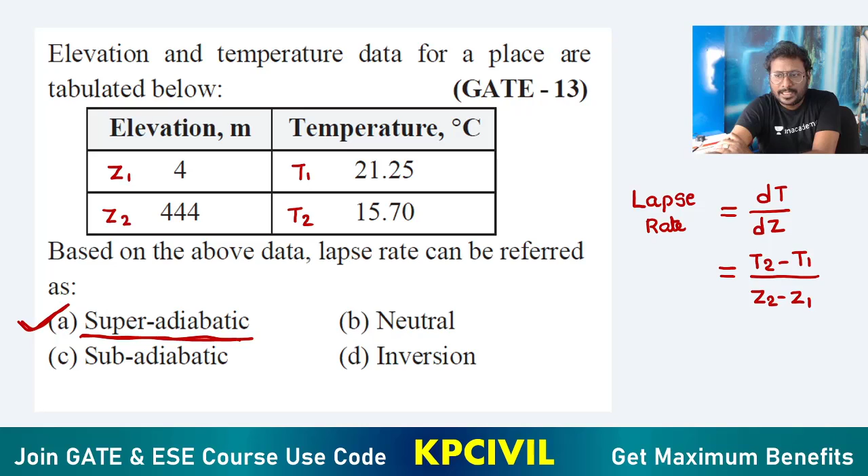So how much concept-oriented is the question? If it is not concept-oriented, they will ask the value. It is concept-oriented only, so that they have given it. You understand? So that they asked about lapse rate - lapse rate is super ALR, super adiabatic lapse rate.

So you got the clarity now? You understand the clarity now? I hope you enjoyed a lot.

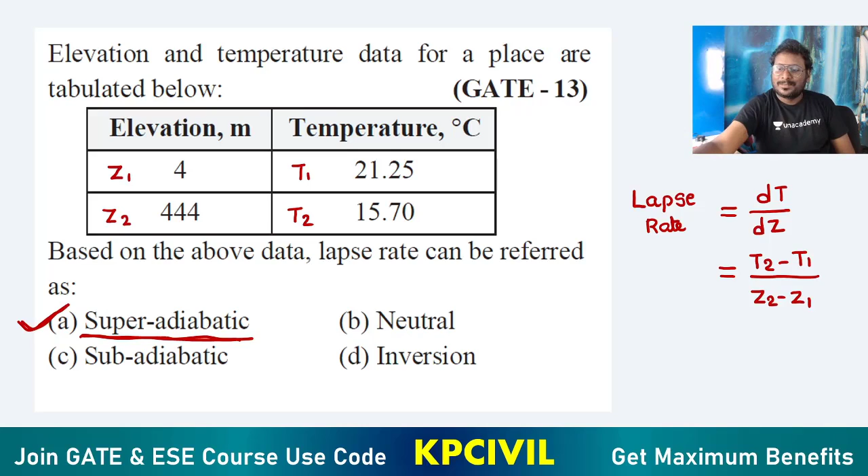You understand most of the questions of IIT Bombay are conceptual. Numericals are direct questions. Conceptual, theoretical questions are conceptual. Numericals are direct problematic, direct numerical questions.

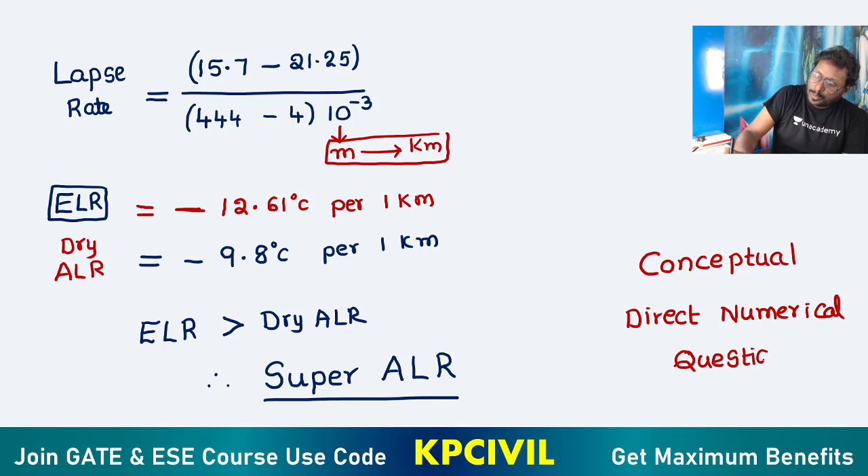So you want to learn from environmental engineering to solve questions of IIT Bombay, with much depth in the subject knowledge.

Because match the following, we have seen 4 match the following questions we have from IIT Bombay. Every year one match the following question they have provided. So be careful, work well regarding theoretical concept, so that you can answer all environmental engineering questions if you know much depth of theory.

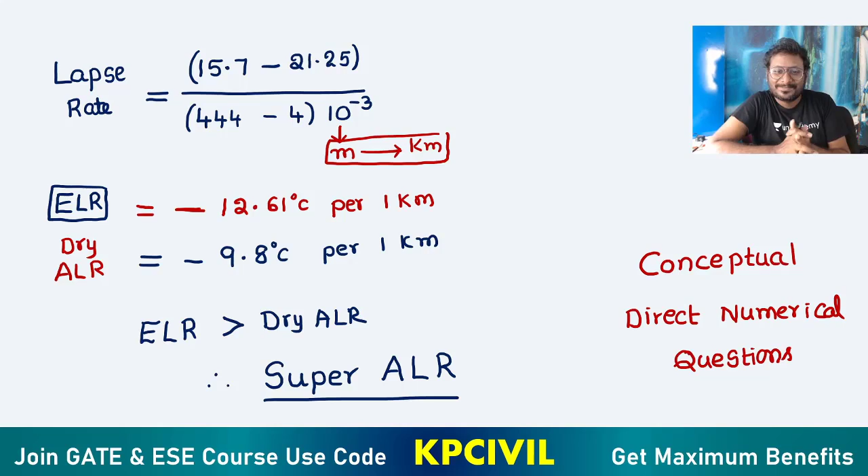Okay, hope you enjoyed the session. I think this is very much helpful for your GATE preparation, especially those who are writing GATE in 2021, IIT Bombay. Okay, I hope you enjoyed the session.